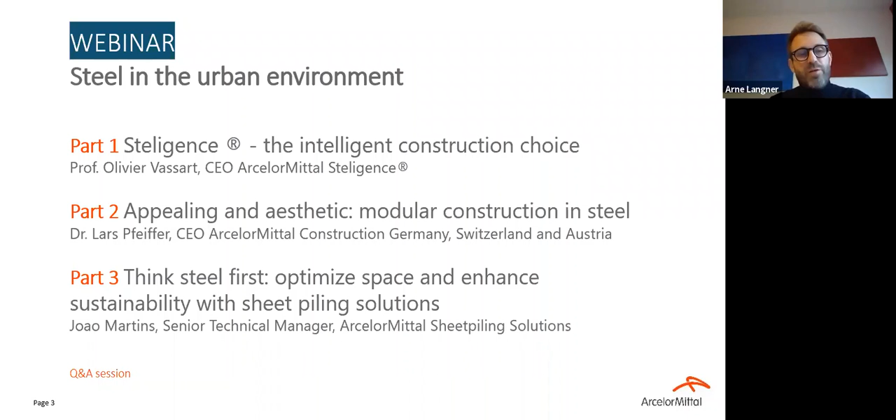So good morning to everyone who is connected. So to start this webinar, I want you to really take a step back. So you are sitting in your living room, in your kitchen, in your house, in your offices, and I want you to look around you. And if you do that, you will see that you see approximately steel everywhere. So if we look around us, we see that steel has been part of our history since ever. So since the Iron Age, steel is linked to the development of humankind, and we can see steel everywhere. So in the construction, of course, but also in all our house appliances, in our cars, in our pens, in everything we can find steel.

But steel is mostly used in construction. So approximately half of the total worldwide steel production is finally ending up in construction. So construction and steel is of major importance. And if we look in Europe, 60 million tons per year of steel is used in the construction sector. Next slide.

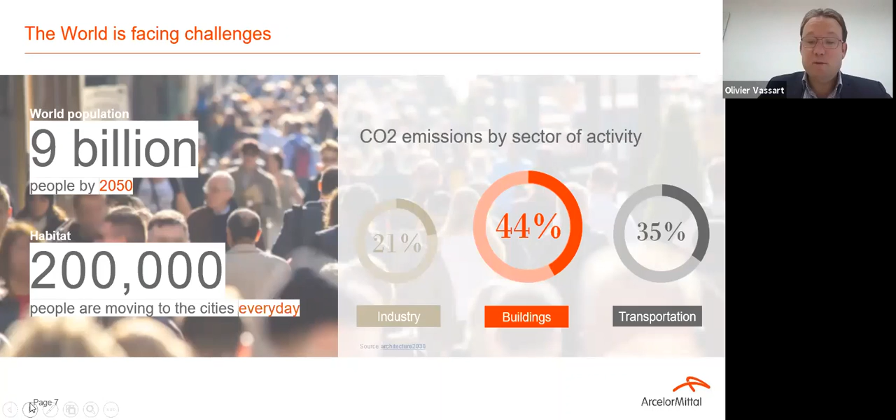Then another challenge that we face is global CO2 emissions. When we look by sectors of activity, we see that the buildings where we live, where we work, represent 44% of global emissions. So if we want to sustain this growth of building new square meters, we need to dramatically change our approach. It's not thinkable and not feasible to continue to build buildings as we build today. We will not find enough raw material. We will not be able to sustain the amount of waste we are generating when we build and demolish buildings.

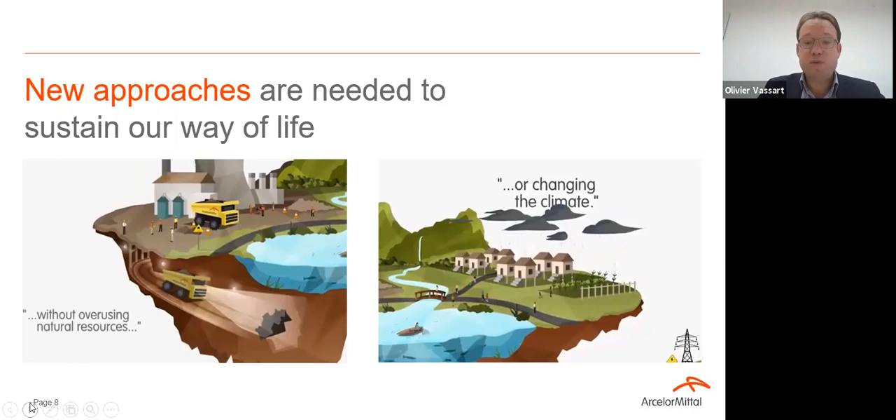So new approaches are needed if we want to sustain our way of life. We need to build without overusing our natural resources. And we need to find a way to be able to reuse or recycle better the building material that we are now putting in our different buildings.

Since more than 5 years, we are thinking about a new way to tackle the construction market. Before, we were looking at construction through the eyes of our client or customer - the people who are buying us the steel. Not you, not the investor, not the building owner, but the people buying the material. So we decided to look at the construction industry from another perspective, not from a material perspective anymore, but really from a building perspective.

What we realize is that today buildings are really a living entity. It means that buildings need to be adaptable. Buildings are interacting with the urban environment. Buildings must in the future be able to change their utility - moving from an office to a residential, from a residential to a co-living part, a co-working part. So we need to think differently about buildings to make them adaptable to future needs.

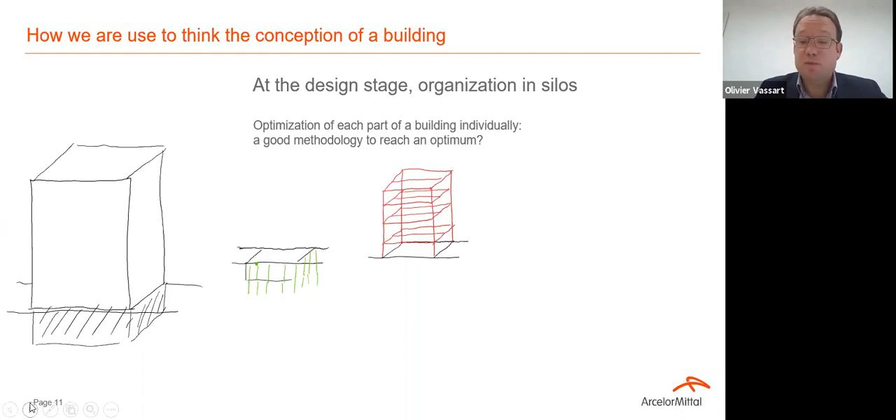The first thing we saw is that from the design stage, we have an organization in silos. It means we have one team working on the foundation of the building, trying to reach an optimum for the foundation. We have one team devoted to the structural stability of the building. We have one team devoted to the flooring system we find in the building.

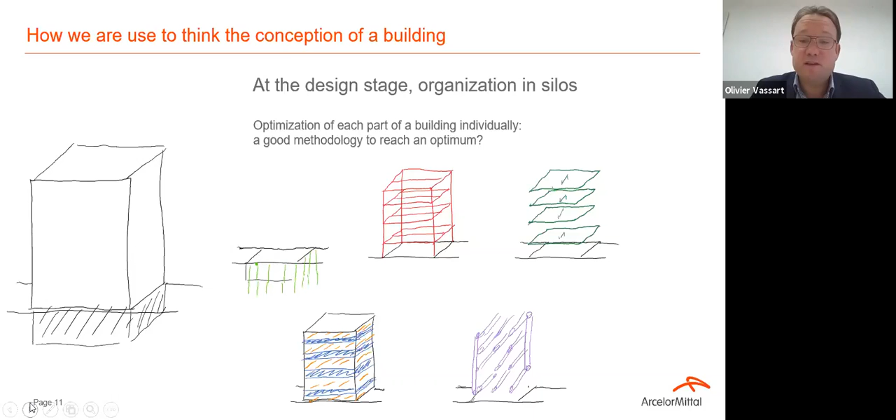Then we have another team which is in charge of the envelope of the building. And finally, we have a last team which takes care of all the fluids, the ventilation, the water piping into the system. Each of these teams tries to find an optimum for their part.

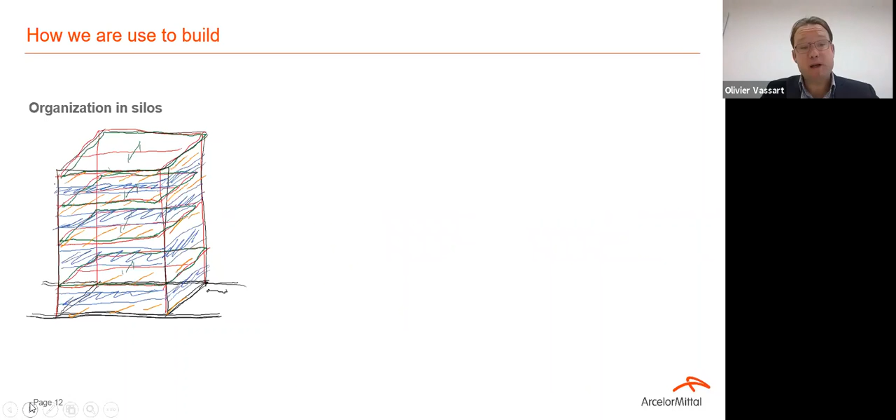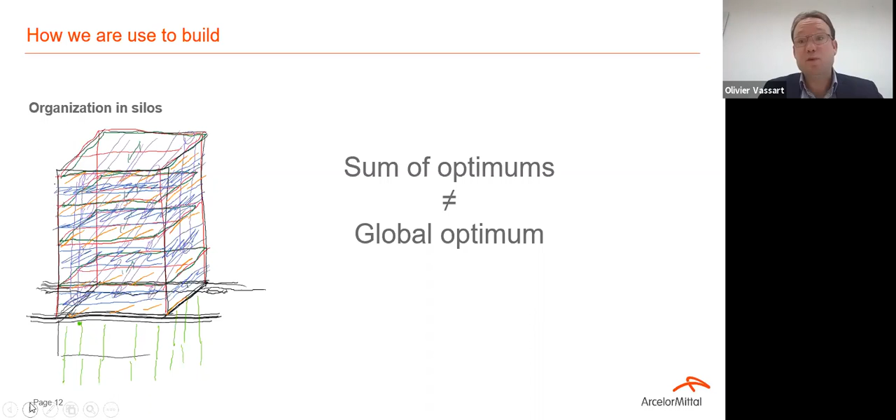And then we pile these optimums one with the other. But in any mathematical system, and barely in any system, the sum of optimums is never a global optimum. So if you really want to optimize your building, to find the best solution, you must not think in subsystems. You must think of the entire building, and sometimes invest more in one part to save twice and have twice the benefit on another part.

Then what does optimization mean? Depending on the stakeholder you talk to, the answer will be totally different. A building owner and investor often focus on the total cost of the building. If you talk to an engineer like me, an optimum is when I optimize the amount of material, when I optimize the weight. Some other stakeholders will look at optimizing the environmental footprint.

If you talk to a building owner or building user, he will talk to you about flexibility. For him, the optimum is when he can change the tenant easily, when he can refurbish really easily. Speed of construction is another KPI.

So it was necessary for us to find a methodology that would reconcile, on one hand, the holistic view of the building, and on the other hand, all these different KPIs, which provide different answers for your building. Because the cheapest building will rarely be the building with the lowest environmental footprint, and will not be the building that is erected and constructed the fastest. So we needed to reconcile all this together into a methodology.

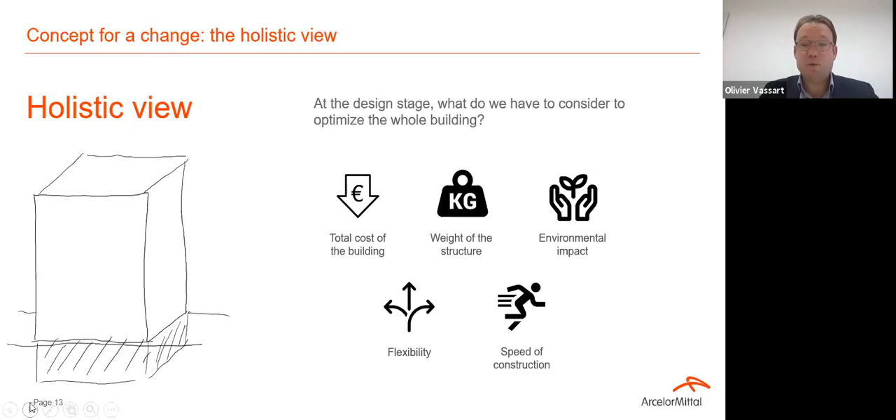So the first step of our approach was to create a scientifically driven peer review method that will allow us to compare building A with building B, taking into account all these criteria. And then we applied this to one office building. That was our first thing.

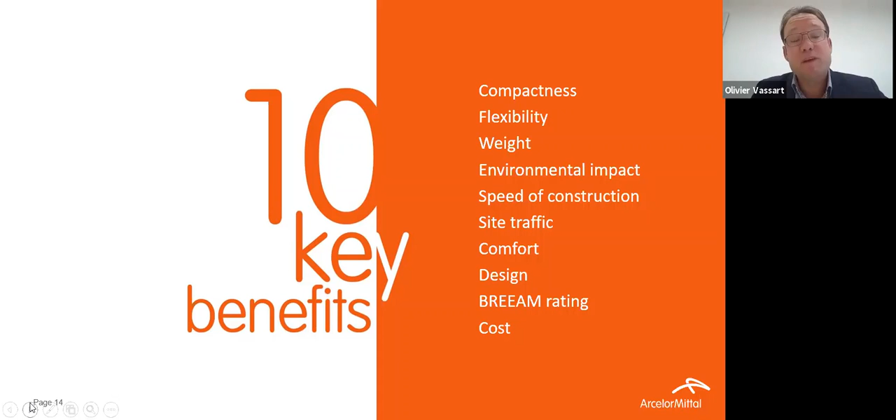And we could see that choosing the right steel solution for this given building can provide us 10 key benefits. I have no time today to enter into all of these benefits, but I will highlight some. The first one, and for me this one really reflects everything.

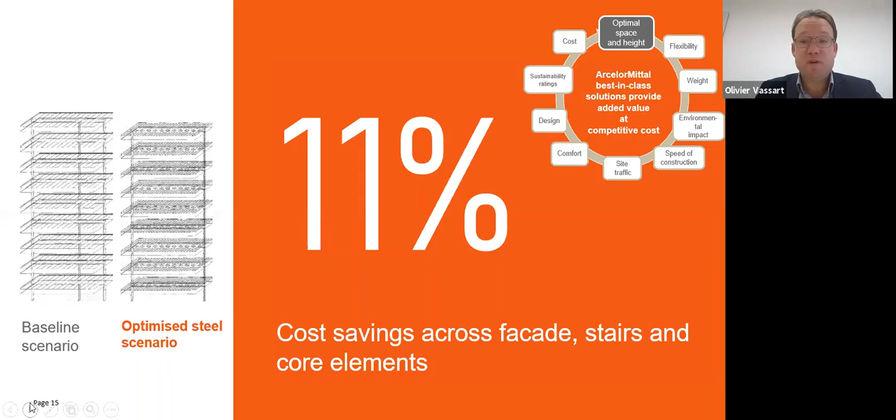But if you think about building in steel from the beginning, you can achieve dramatic savings. In this particular example, we saved 11% on the cost of the facade, the cores, and the stability of the building. This is a dramatic saving you can only achieve if you think about your building first, and from the beginning, in steel.

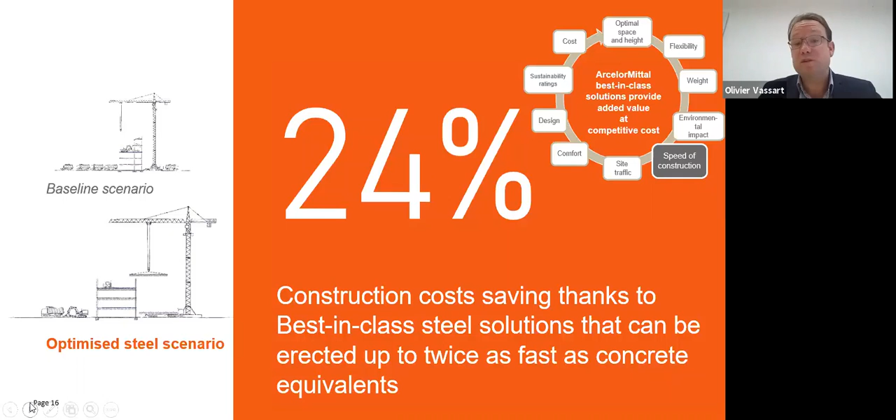The second part is speed. Even here, comparing steel with prefab concrete, not cast-in-place concrete, we can build the structure twice as fast with the steel solution. This brings you a quicker return on investment because your building is finished earlier, and it also decreases construction costs because construction time is reduced. A job site has huge fixed costs, and these can be reduced by increasing speed.

Finally, if we look at the total cost of ownership, we can provide an economic benefit of at least 15% compared to the alternative. But again, this is only achievable when the building is conceived in steel from the beginning, where you can capture the advantages and value of steel from the start.

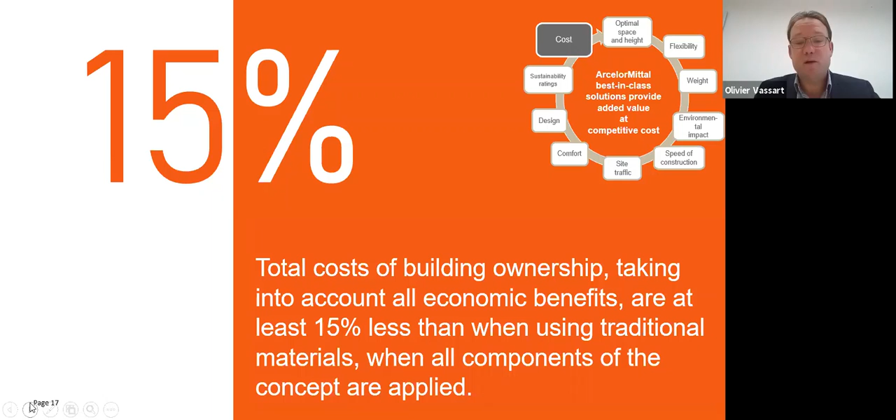With these findings and tools in hand, we realized we needed to change ourselves and our approach to the construction market. Why? Because we were organized in silos, like the construction industry itself. We had teams promoting the structure, teams promoting the floor, teams promoting the facade, and another team for the piping system. We said we needed to change this within our own company.

That's why we opened this branch called Steligence, which regroups all the solutions and products that ArcelorMittal can offer the construction market. This allows us to take a global approach to the building and helps you find the best solution for your project.

Because when you work within a single product line, you will always push to demonstrate that your product line's solution is the best for the project. But when you have a complete portfolio of products and solutions in hand, you can advise which one is truly right for the dedicated project.

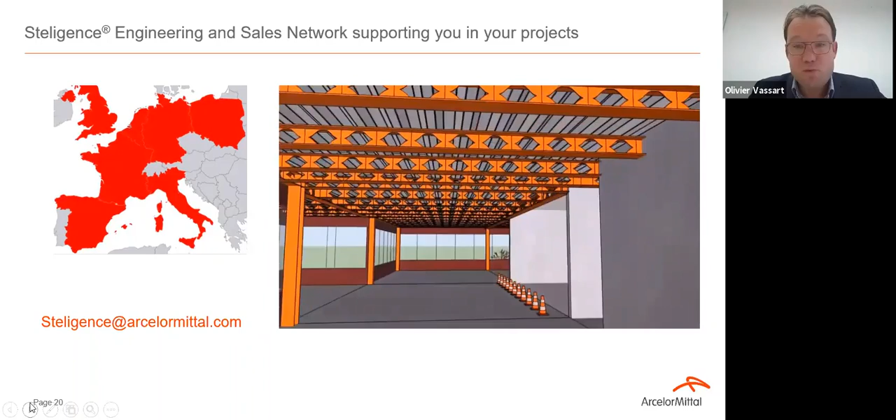So in each European country, we have put in place a network of engineers and architects who support you in your different projects. They help you at the early stage of the project to find the right and best technical solution for your dedicated project, following your KPIs, because no project is the same - for each one, we have the right technical solution.

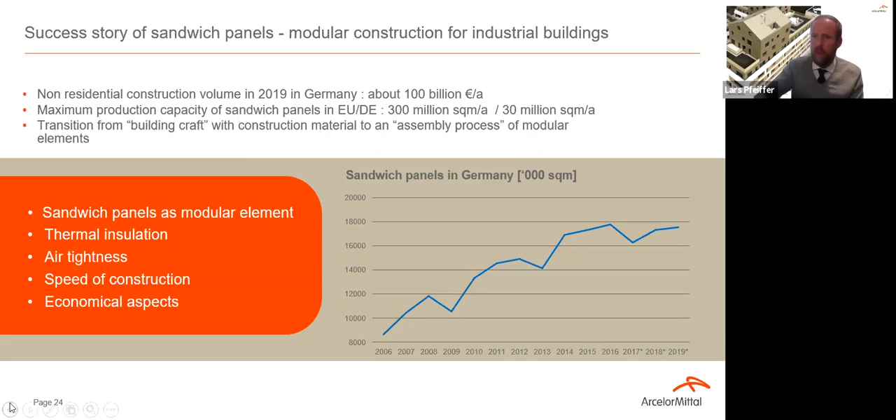I'm trying, Pascal, to go to the next slide, but I'm not sure if that is working for me. If you can, yeah, thank you very much.

Coil-coated steel provides fully finished surfaces in endless colors and shades, and at very reasonable prices. Processed in panels, it generates highly durable, mechanically strong, lightweight, and sustainable building products.

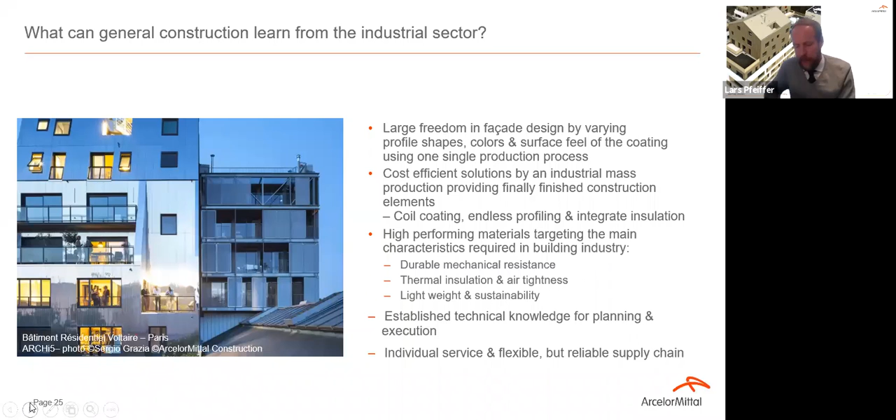This is available with many years of experience and established technical knowledge for both the planning process and also the execution on site. Service levels are generally very high and established supply chains can be capitalized.

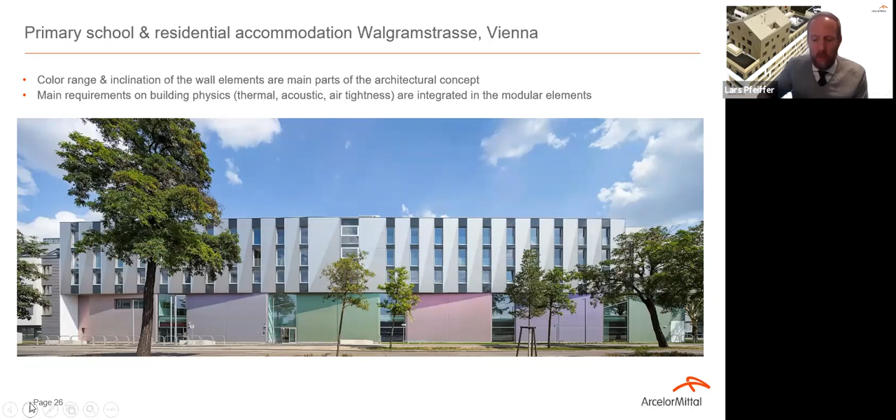Let me give you some examples from projects realized in the urban environment. Here you see a kindergarten in Vienna applying sandwich panels in different shades, right next to one of the main roads entering the city. You can imagine the limitations in space that occur during the erection of such a project, and the benefit prefabricated systems bring in terms of logistics and erection speed.

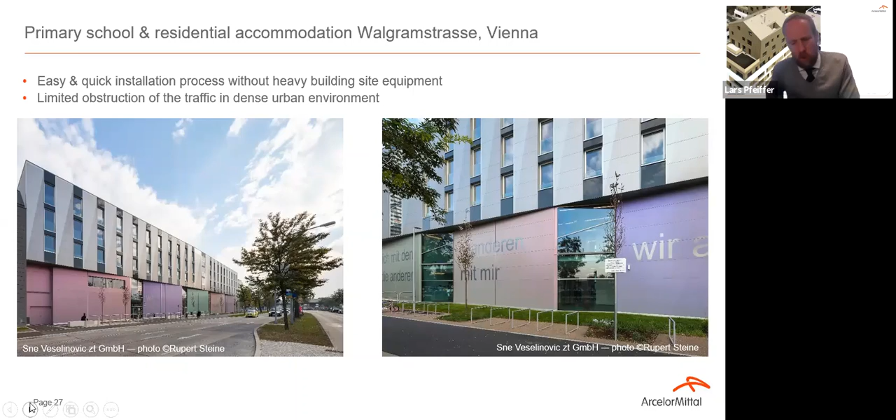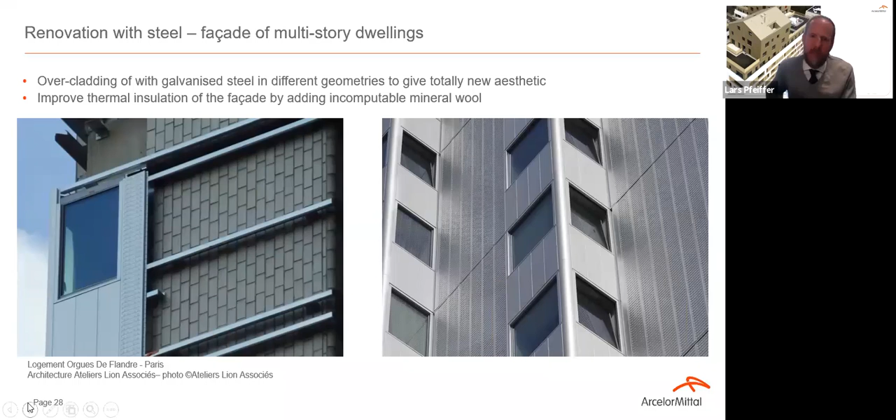Such systems do not only work with new build, but also, or maybe even better, when it comes to refurbishment. This example is a high-rise building in Paris, giving the whole structure a completely new and appealing appearance, being totally non-combustible when combined with inorganic insulation material, as opposed to other solutions like thermal insulation systems that typically employ EPS together with plaster.

Steel, as you know, a fully and endlessly recyclable product, is not only good for the building envelope, but in the form of lightweight composite flooring systems, ideal for the reconstruction of gutted historical buildings, also fulfilling very high demands in fire protection.

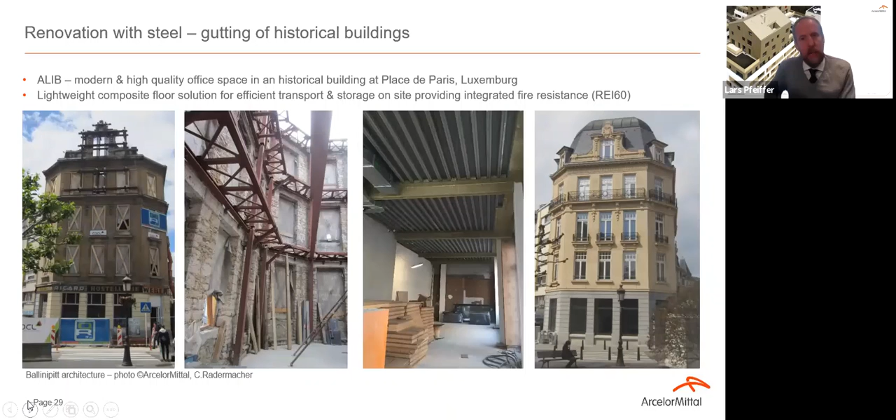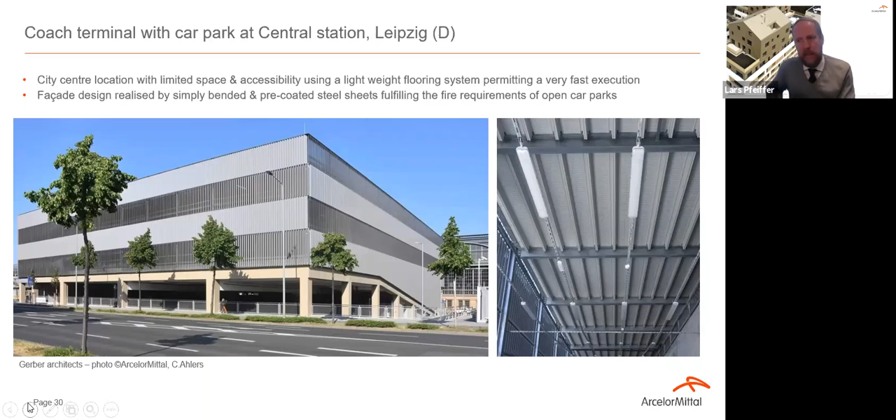Even very big monolithic structures like this car park in the city center of Leipzig, right next to the historic railway station, can mingle pleasantly into the existing surroundings.

So let me invite you to analyze the potential of modular prefabricated construction for your business. Let's investigate how to become more efficient and sustainable in urban construction. Let's continue, and that's probably the most difficult and most important point, to change the mentality in construction by inspiring smart ways of building, smart ways of constructing.

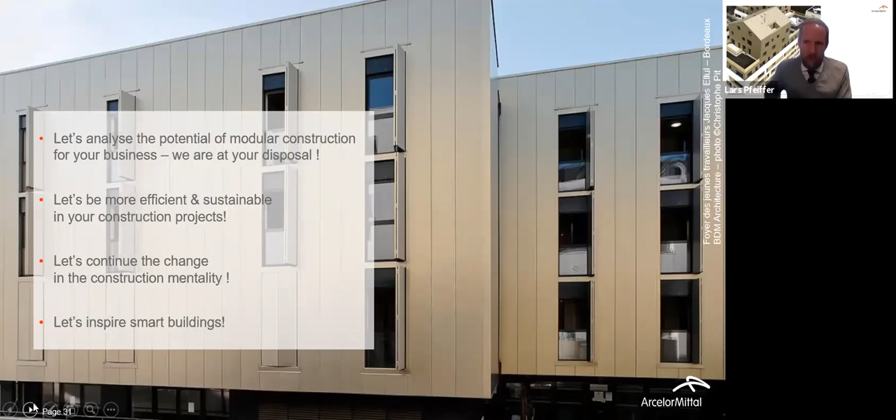I would have a first question, and meanwhile others can type in the Q&A section if you have any questions. My question is which role has a green building certification, like in Germany DGNB, or LEED or BREEAM, and how can steel help support obtaining such a certification, and what would it mean for investors?

Thank you, good question. We see that it's becoming more and more important also in Germany for construction. I wouldn't say Germany is really the forerunner in this, but we see big international investors coming with high demands for sustainability, looking at the environmental impact not only of the construction, but also of the service life of the building.

Lightweight construction in steel is performing particularly well in this. By building light, it automatically minimizes resources, and employing steel, which is an endlessly recyclable product, contributes to the sustainable footprint of the construction.

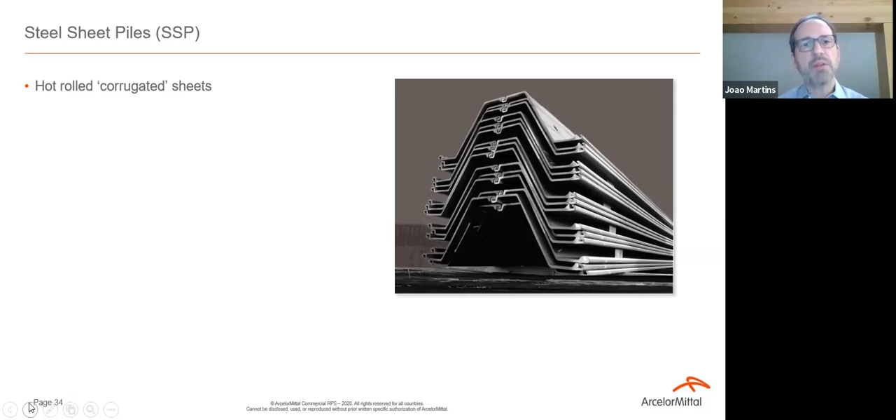So what is a sheet pile? It's in fact a hot-rolled corrugated sheet with a specific feature, and that feature is a Larssen type interlock, which allows us to thread the sheet piles together so that you can build a continuous wall, usually for retaining walls, but sometimes also simply to prevent pollutants passing through this wall. And of course, the difficulty of such sheet piles is the rolling, because it's relatively complex to roll this type of interlock.

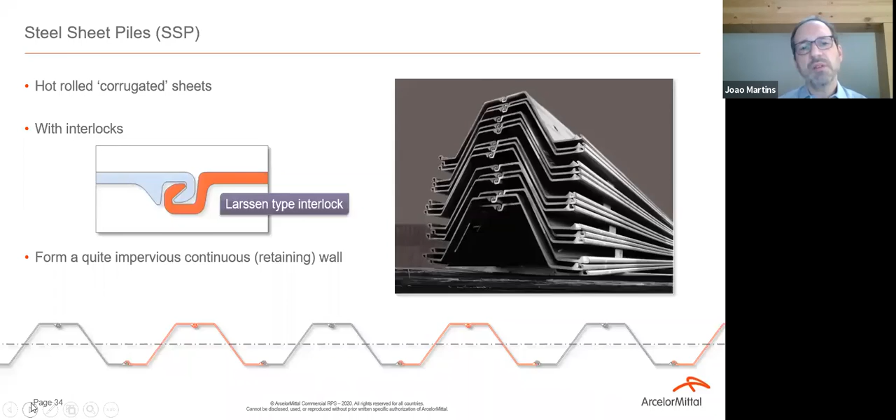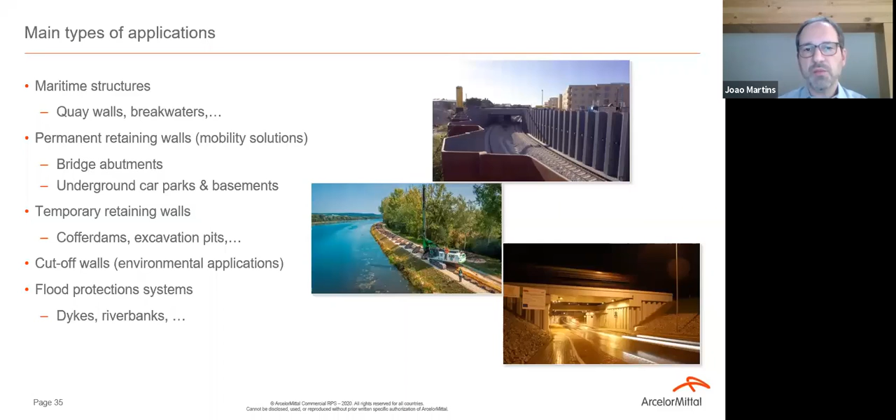So if you want to build, for instance, a bridge pier in the middle of the water, you'd like to work in the dry, so you use a cofferdam, which is quite watertight, but also for excavation pits in urban areas, you would use a retaining wall, and a temporary retaining wall in sheet piles is one of the options. Cut-off walls, as I said, keep pollutants from passing through the wall, and then flood protection systems, like in the picture where you see reinforcement of an old dike or riverbank, so that it will be able to withstand the floods that will come in the future with a change in climate.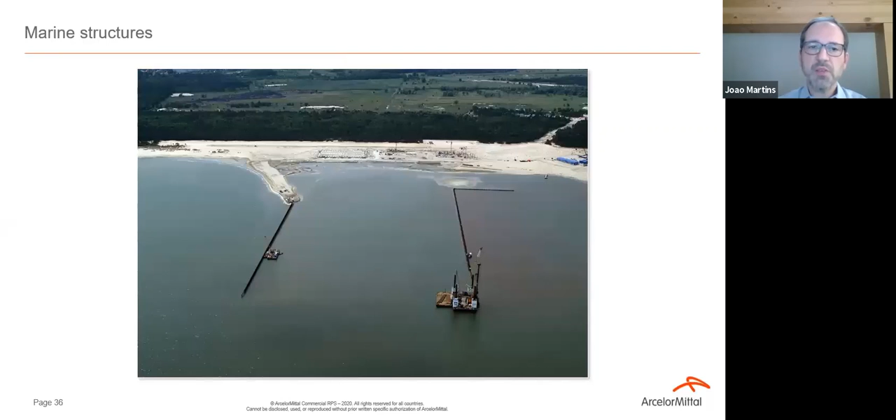So for maritime structures, the big advantage is that you have a prefabricated product that you can install directly into the water, like in this picture, so that you can be actually installing the sheet pile wall while backfilling at the same time concurrently, increasing the speed of execution.

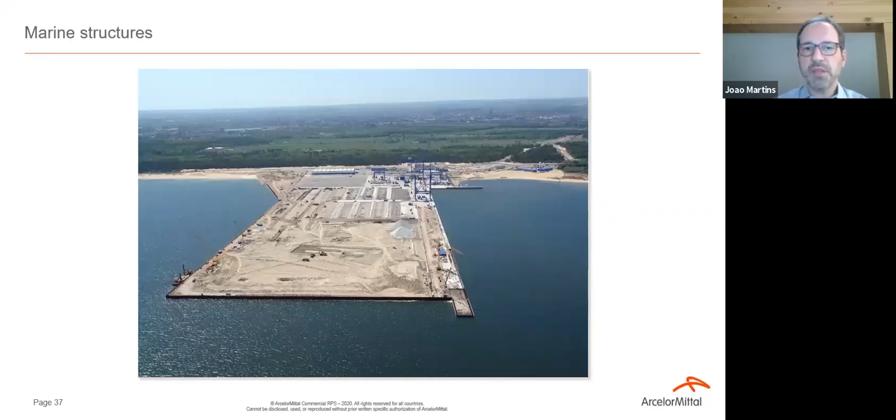As the previous speakers have already told, that's one of the big advantages of steel: the speed of execution. This is a container quay wall in a container terminal in Poland. You see it's like a 1 kilometer long wall, which will be there for the next 50 years and above.

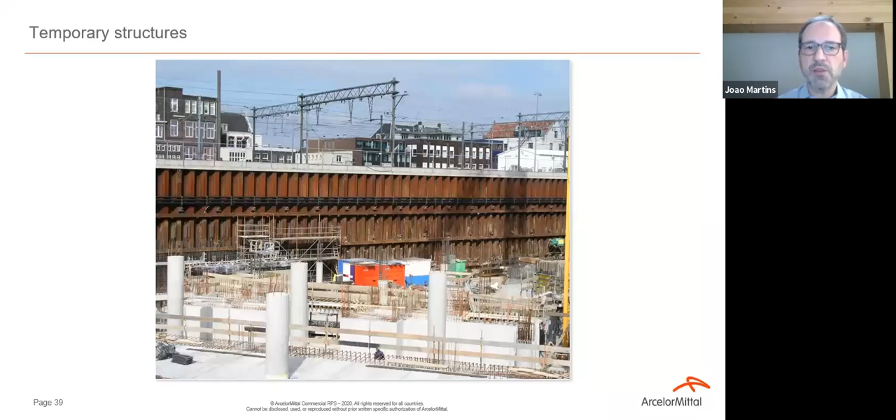But in temporary structures in urban areas, quite often architects and engineers are reluctant to use it, because they still believe you cannot drive sheet piles in urban areas without a lot of noise and vibrations. The old diesel hammers and all this stuff still exist, but nowadays there is pressing equipment, like you can see here near the central station of Amsterdam, a relatively high retaining wall installed close to the railway tracks, which are quite sensitive to settlement. So everything is feasible. The new technologies allow it, and not only for temporary, but also for permanent structures.

A few pictures of underground car parks. This is quite impressive: the building for the Markthal in Rotterdam, but below that we have 3 levels of underground car parks which have been built with sheet piles.

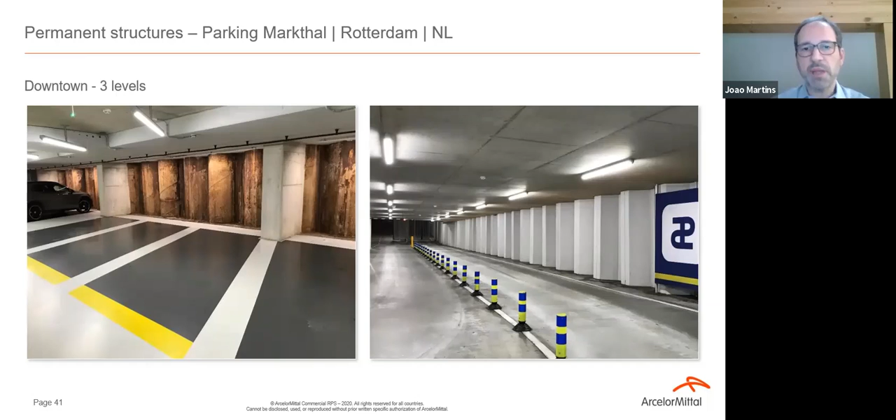In the left picture you see the rusty appearance of the steel. The architect wanted to keep this specific aesthetical aspect of the steel, so it's rusting, as you can see. But on the other side, at the entrance, you have standard sheet piles that have been coated with a coating which is also quite pleasing, and protects the sheet piles from this rusting.

So what are the main parameters that you have to take into account, and why are sheet piles cost effective when it comes to underground car parks? Well, the first one, as we already saw, is the execution. It can be executed much faster, up to 2 times, as you'll see, especially when you use this large AZ800 range, so wide piles, which can be driven quickly into the ground.

Then the second thing is that it's not only temporary, but it can also be used as a permanent retaining wall. Furthermore, it can transmit vertical load, so it acts also as bearing piles, which can reduce the amount of natural resources needed for the bearing capacity. As I already said, nowadays with the pressing equipment, there are no vibrations.

The noise is very low, so you can use them also in urban areas, with low settlements, and a design life of about 50 years and more. Bridge abutments today are designed for 100 years and more, whereas usually a quay wall is 35 to 50 years, and underground car parks normally 50, sometimes 100 years.

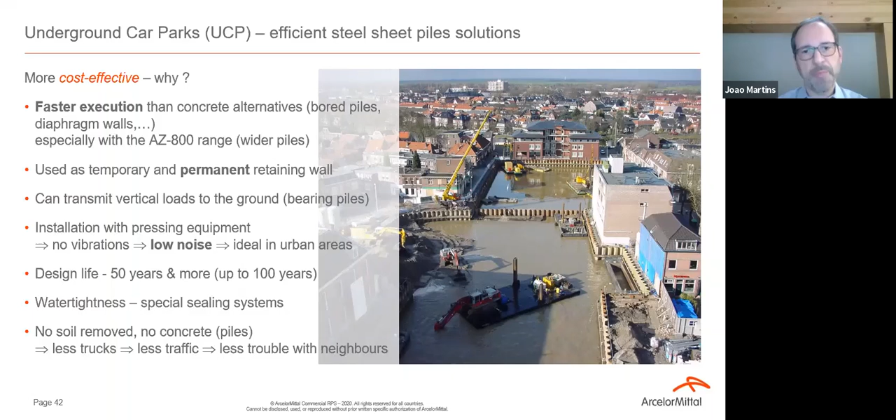The other thing which is quite interesting is that it's a displacement pile, so you don't have to remove the soil in order to build a secant pile wall, for instance, with concrete. So you have less spoils, less soil to extract, less transport, and less trouble with the neighbors because of less traffic. Now, there are 3 different alternatives to build such an underground car park.

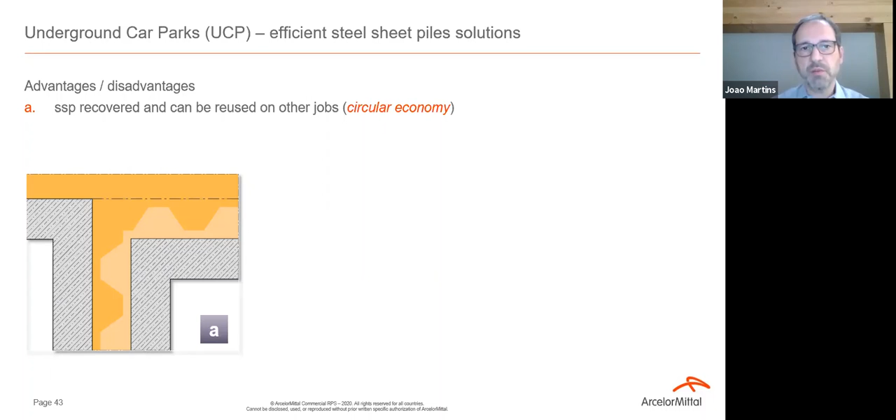The first one is when you install the sheet piles as a temporary retaining wall, and then you extract them. It's good for the circular economy because you can reuse the sheet piles for other jobs. Sometimes the contractor prefers to leave the sheet piles in the ground, which is from an environmental point of view not a good thing, but you don't need to mobilize extracting equipment, so it's a way to do it.

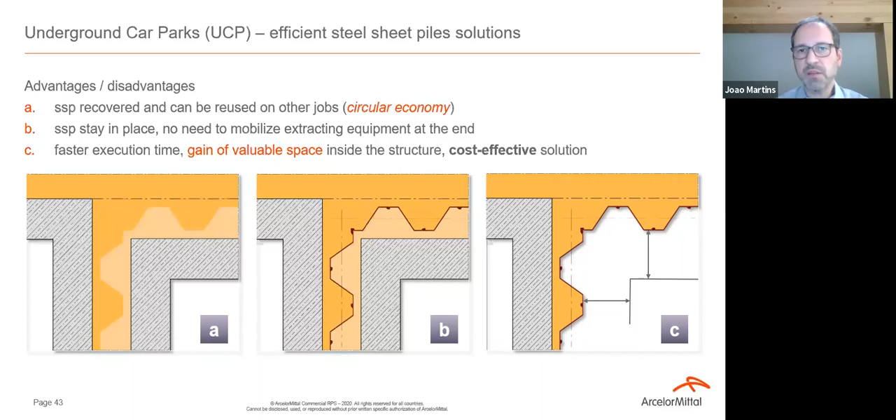But the one that we prefer, and the one that's probably the most cost effective, at least in our opinion, is where you don't need these concrete walls inside and use the sheet piles also for the permanent wall, gaining also some valuable space, especially in densely populated areas. We're talking about a few percent of the space that can be saved in this way.

And at the end, seems to be stuck.

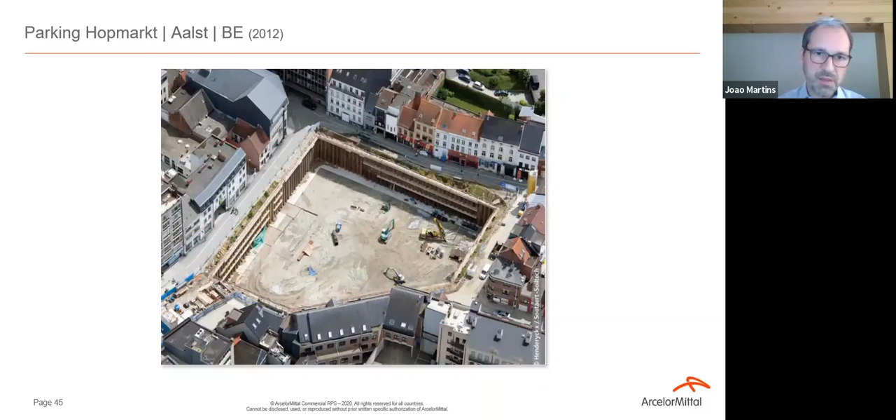Okay, another interesting way to do it is this one.

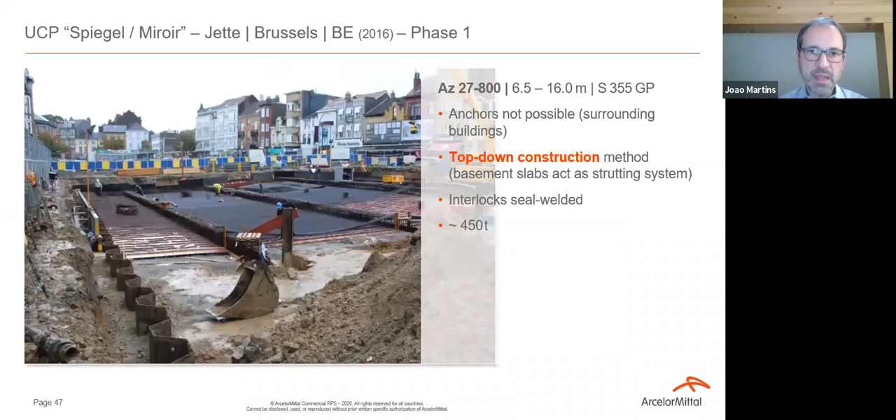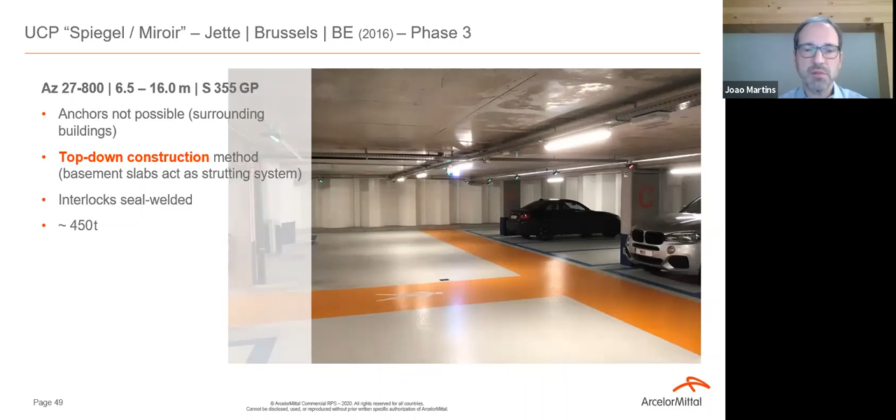This is in Brussels, where they use the top-down construction method. This means that you install the sheet piles, pour the top slab, and then start working below, excavating beneath it. Afterwards, this is how it looks - very nice. The advantage is that you can be working above the ground, for the building, or open the space for the cars. You can also save some time, so it's a good thing. We're talking about a few weeks up to a few months, which is quite interesting.

There was a comparison study made by a very renowned consulting engineer in the Netherlands, which we asked to compare these different alternatives for the Dutch market. This is the key finding about the cost - we'll see also about the environmental impact. We're talking about a difference of at least 38% when comparing steel sheet piles with the alternative methods, being the cutter soil mix or the secant pile walls.

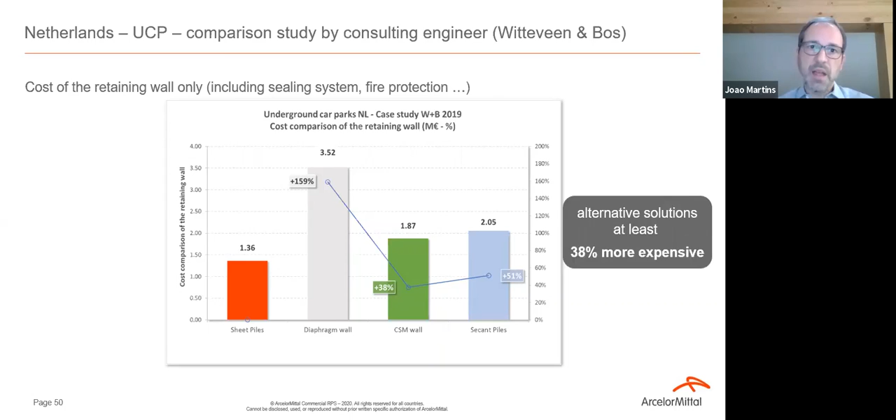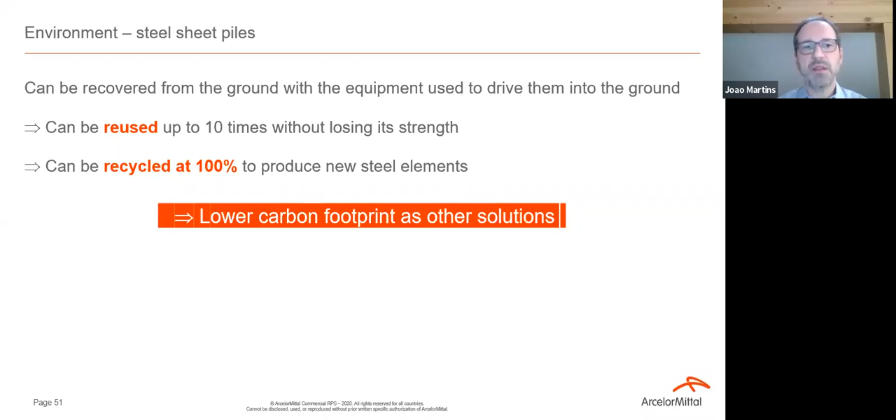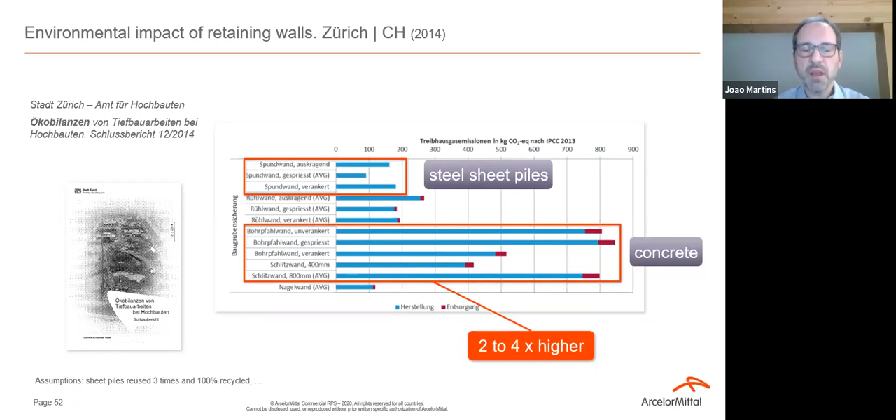From the environmental point of view, as I already said, we can reuse the sheet piles a couple of times, normally for temporary structures up to 10 times, and then it can be recycled. So usually the carbon footprint is lower than for other solutions. There was a study made by the city of Zurich in 2014 comparing steel sheet pile solutions with alternatives, so concrete, and the result is quite appalling. The carbon footprint, CO2 equivalent emissions, are 2 to 4 times higher if you consider concrete compared to steel sheet piles, and this was done by an independent company working for the city of Zurich.

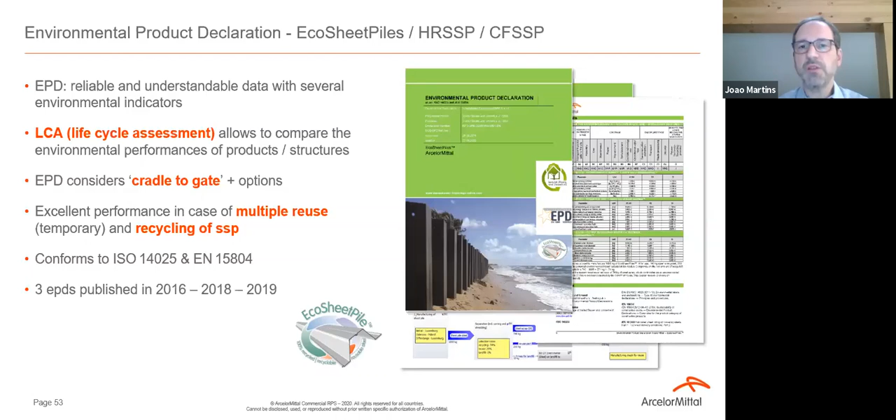We already mentioned EPDs, and this is a good thing because, in fact, if you want to compare the environmental footprint of different solutions, in our opinion you should go through a life cycle assessment and compare the solutions with environmental product declarations, which correspond to the product you're going to use, not with generic databases. That's the best thing to do.

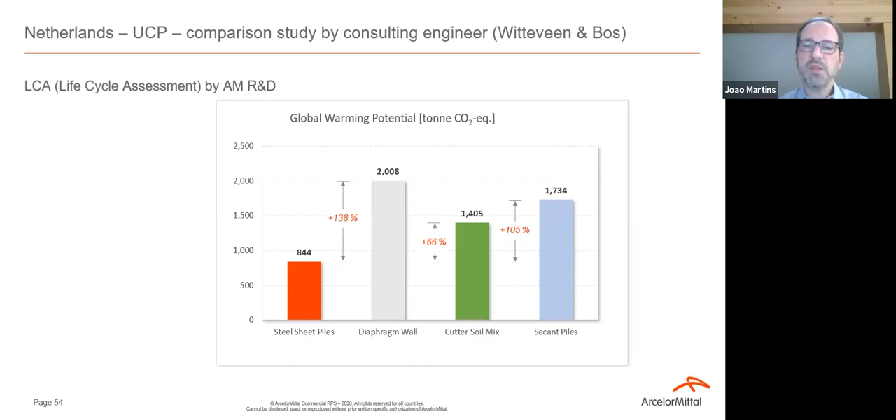Based on this same study by Witteveen and Bos in the Netherlands, life cycle assessment showed that from this point of view, if you look at the global warming potential, the difference is even higher. So rather than the 40%, we're talking about at least 60% and above if you're looking at the global warming potential.

Now, what we're also working on is traceability. That's quite important for facility management, but also if you want to reuse the sheet piles afterwards. The idea is to be able to know exactly the properties - the technical properties, but also when it was installed and the state of the sheet piles of each element after a few years. This is something that will also be done with building information modeling, which will be possible in the future.

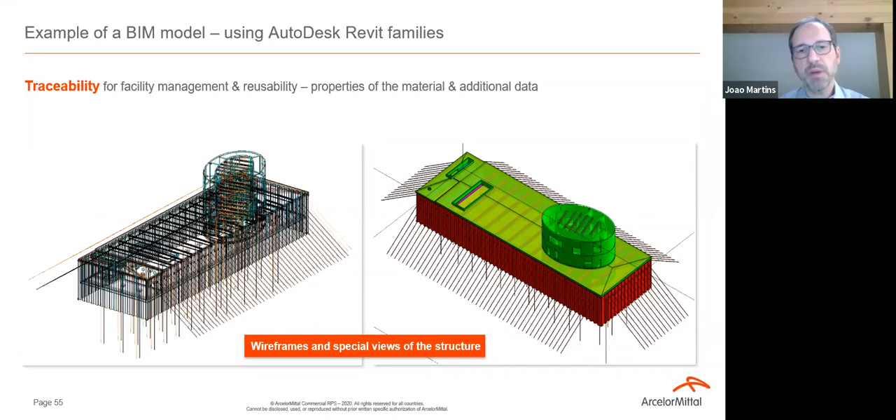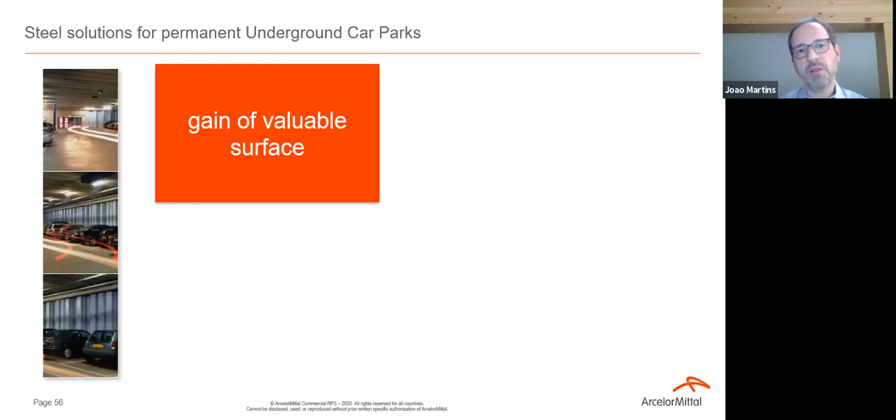So if you have a few takeaways from these few minutes: if you use sheet piling not only as a temporary but also as a permanent retaining structure, you can gain valuable space inside of your underground car park or basement.

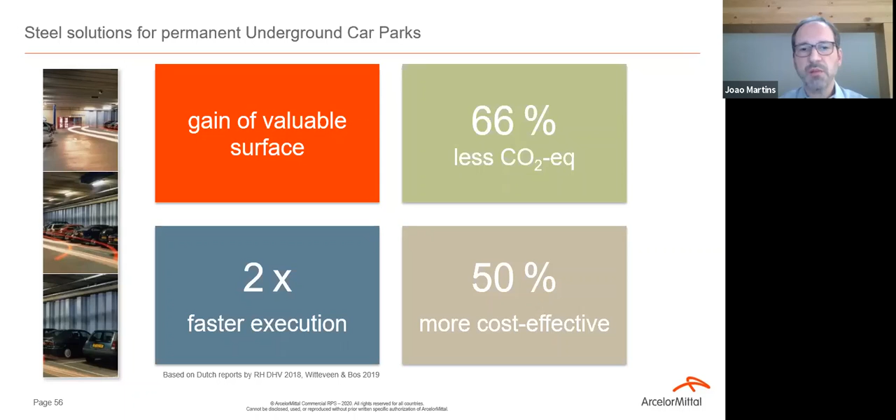It's always the same - you have an environmental impact which is much lower. In this particular case, it was a little bit more than 60%. Faster execution - also like for the buildings, it's up to 2 times faster to execute the retaining wall. And from the cost point of view, which is a very important key indicator for investors, we're talking about something from 50% and above more cost effective.

Thank you very much for your attention.